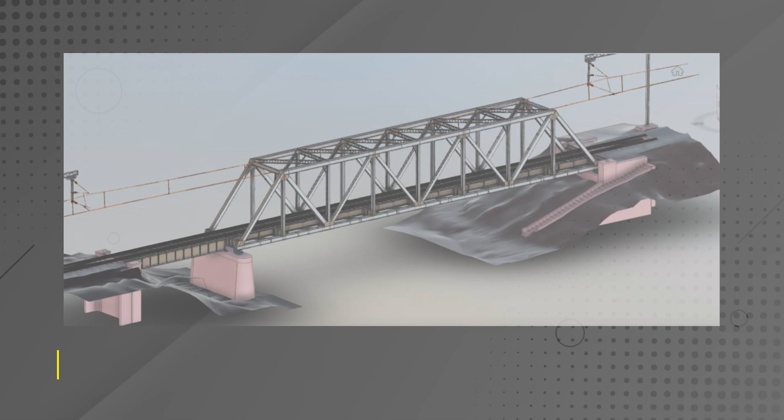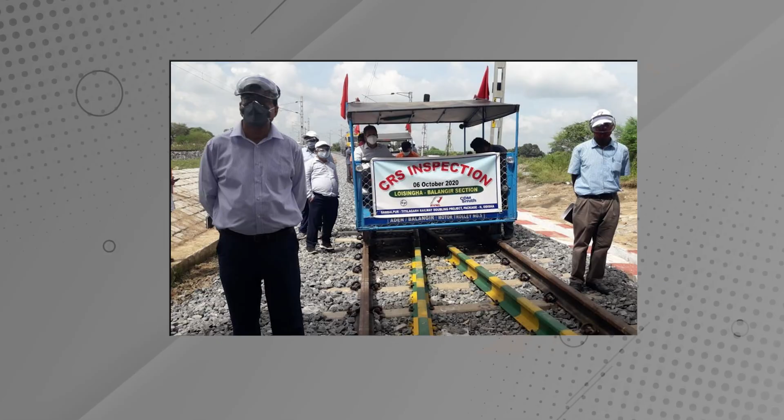Indian Railway has initiated 4D bridge information modeling for bridge inspection, combining 3D modeling with existing bridge data like point cloud and oblique images for inspection and health monitoring, overcoming traditional inspection methods that compromise worker safety and are time-consuming. North Western Railway Division has awarded the work to Monarch for digital twin modeling for inspection of railway bridges using drone and terrestrial mapper.

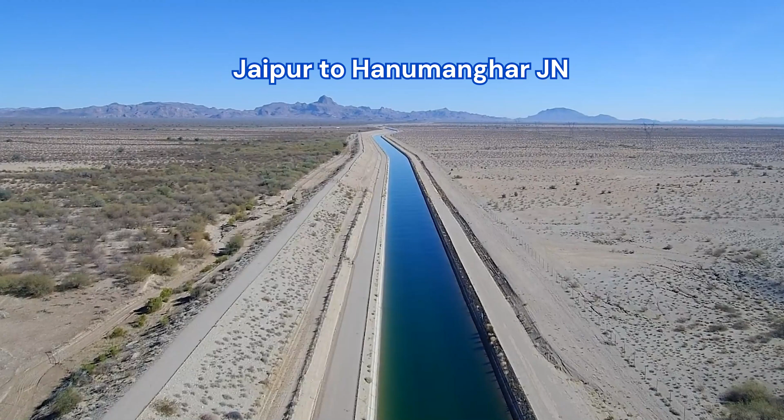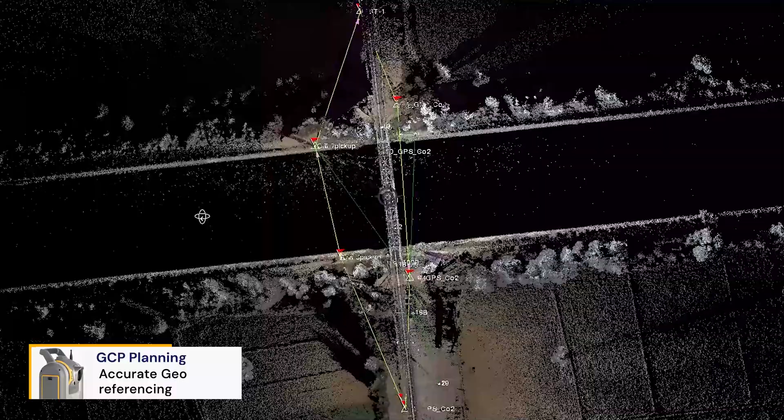Railway bridge number 18, located over Indira Gandhi Canal connecting Jaipur to Hanumangarh Junction at kilometer 28.610, underwent Ground Control Point (GCP) planning to ensure accurate georeferencing. GCPs were strategically placed around the bridge and its approaches, considering accessibility and line-of-sight requirements for optimal data acquisition.

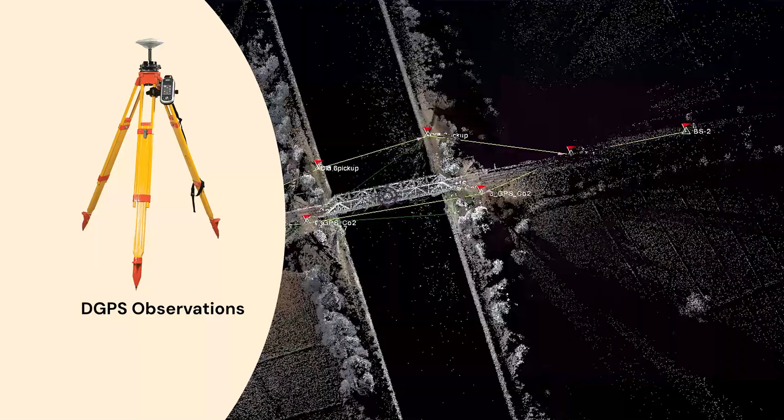DGPS observations were carried out, and traversing was conducted using a high-precision instrument like SX12 scanner to establish a reliable coordinate framework.

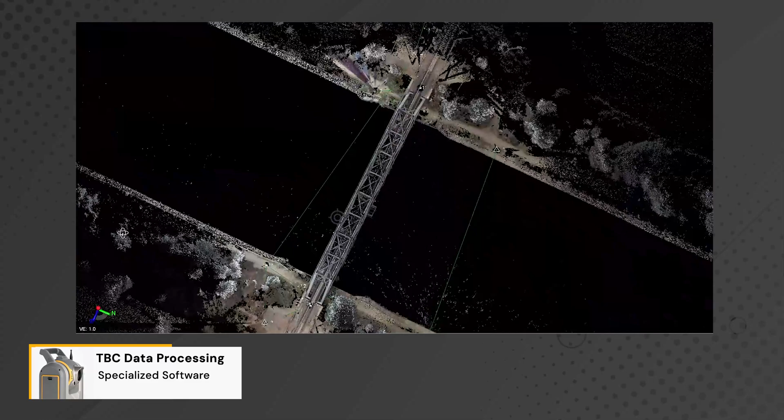Using the SX12, high-resolution point cloud data and 360 degree panoramic images were captured for documentation of the bridge's geometry, surface conditions, and surroundings. The collected point cloud data and panoramic images were processed using specialized software to refine accuracy and align the dataset with the coordinate system.

Using Autodesk Revit, a detailed 3D model of the bridge was created based on RDSO drawings. The refined point cloud was seamlessly integrated with the Revit 3D model, ensuring that the virtual representation accurately reflected the as-is conditions of the bridge.

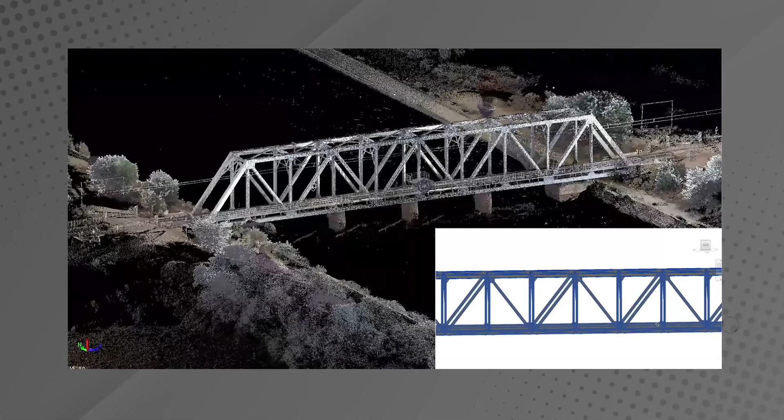A thorough analysis was conducted to compare dimensions derived from the point cloud against the RDSO specifications. Discrepancies, if any, were identified and noted.

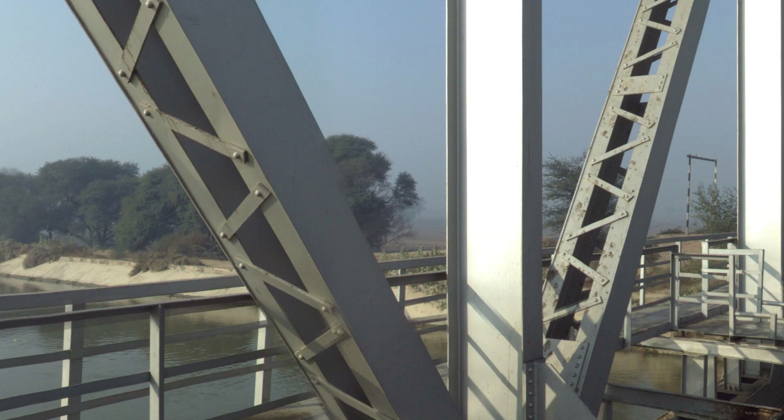The 360 degree panoramic views captured were utilized to visually inspect and analyze bridge member joints and supports to identify potential issues and provide actionable insights for maintenance planning.

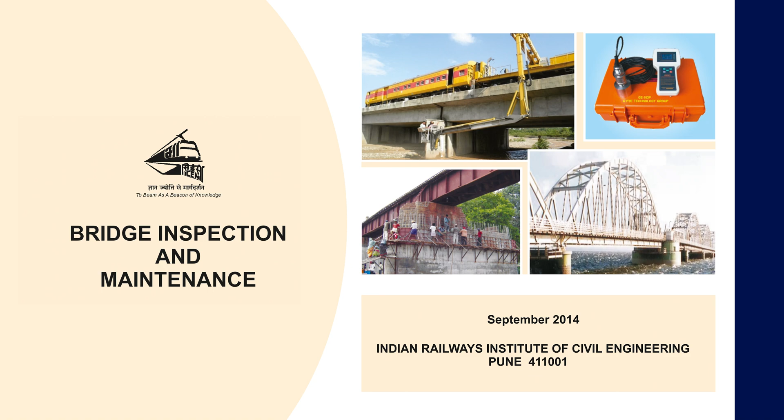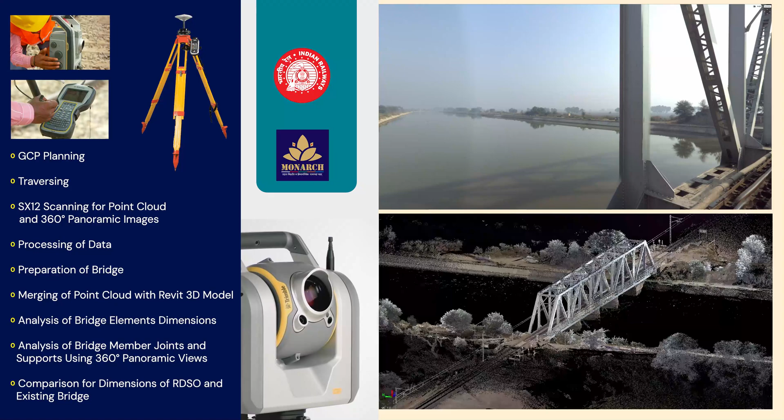The leverage of 4D information modeling in bridge inspection will ease the monotonous inspection method, which not only compromises worker safety but is also time-consuming. This 4D BRIM model initiative supports decision-making processes related to bridges for scheduled maintenance, ensuring safety and structural integrity, reflecting Indian Railways' commitment to modernization and safety for bridge inspection.